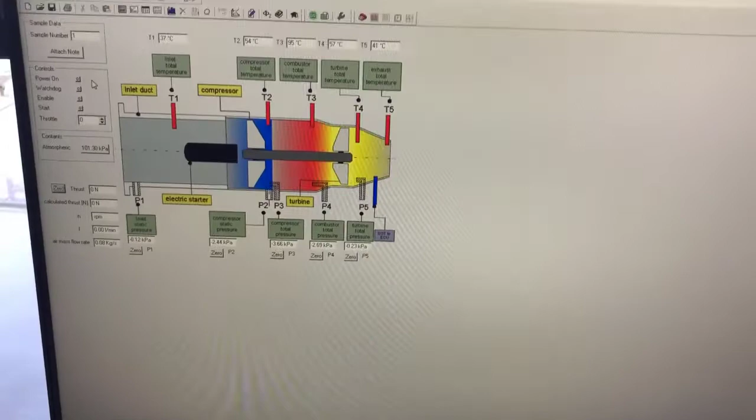So first we will discuss the equipment that we're going to use. The jet engine that we have here is manufactured by Armfield. We have one software wherein we can do the control, and all the readings we can take from the software. So here, as you can see, we have the mimic diagram of the complete gas turbine: the inlet duct, the compressor side, the turbine side, and the electric starter. All the temperature and pressure at each point is given by this software.

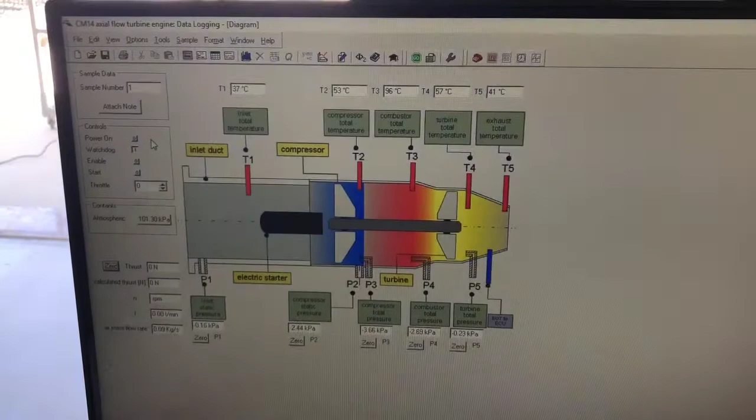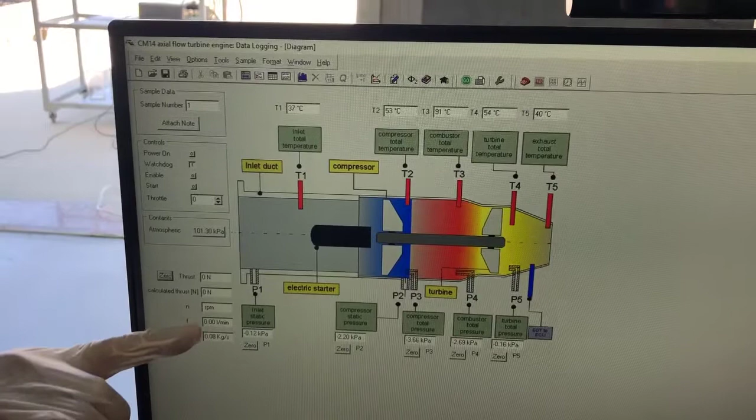Now on the left side, you have the control: power on, watchdog, enable, start, and throttle. We will discuss this later during the experiment on how to control the equipment. Below it, we can read the thrust produced by the turbine, the calculated thrust, the RPM, the fuel consumption. This is the volume flow rate of the fuel. Below it, we have the air mass flow rate. So this is the air coming in on our turbine.

So there are three parts of this equipment. One is the software, second is the electric console, and then the equipment itself. So first, this is the software. Next, let's go to the equipment. So this is the electric console. This electric console is the interface between the computer and the equipment that we have. This is the second part of our equipment. And the third part is the gas turbine itself.

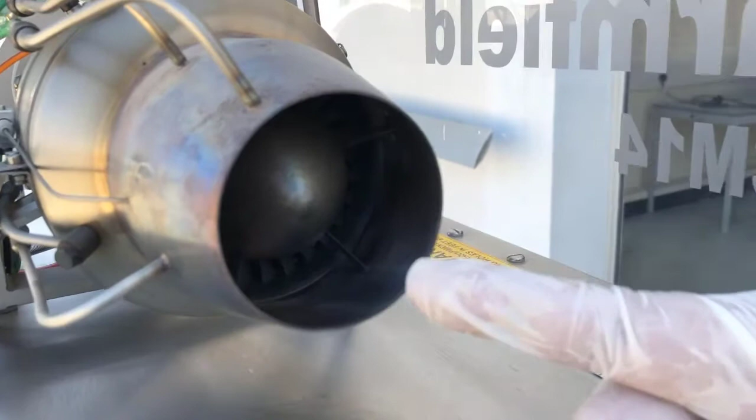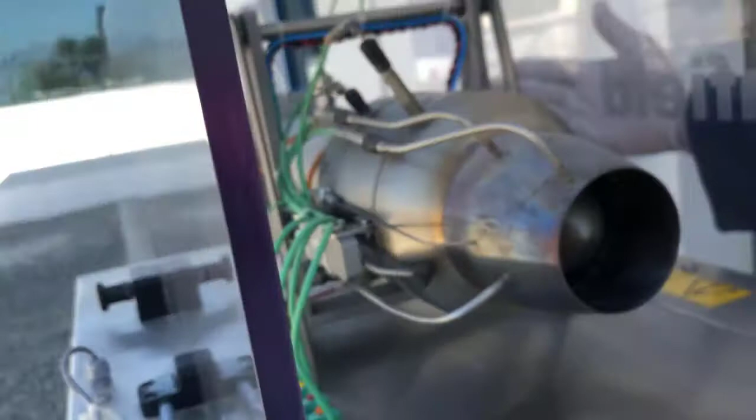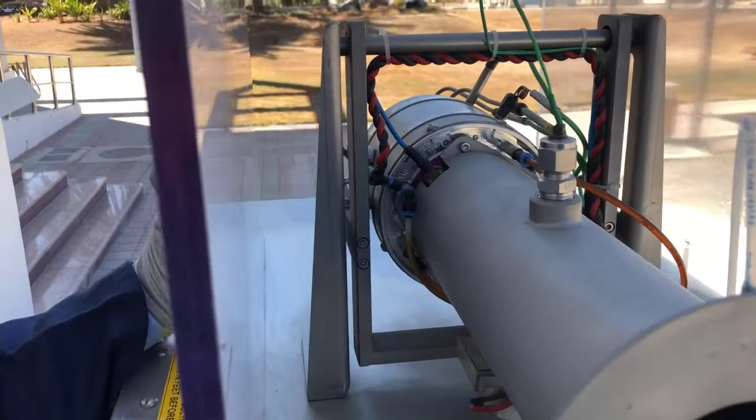Okay. So we have here the air. The air intake will come from here. Then we have one combustor here. So we have one compressor here, the combustor, and the turbine itself at the end here. As you can see, if you make it closer, the turbine blades are inside. So the process in this experiment: from the air intake, the air will be compressed inside, and then there is a combustor in between. Introducing the fuel and the air, it will burn and run the turbine.

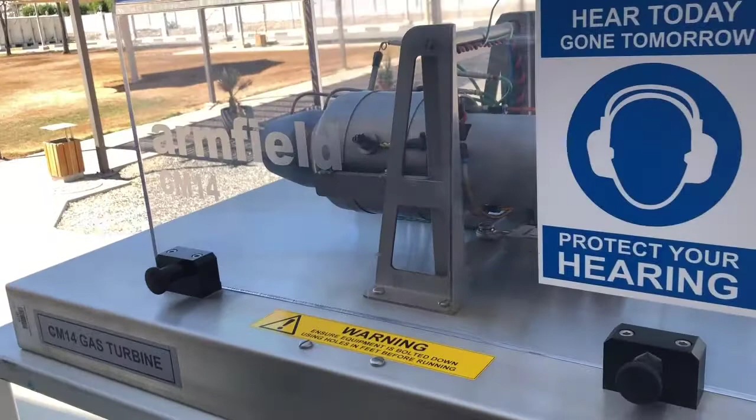So in the first experiment, we will help the students familiarize with the control of the equipment itself, before proceeding with experiment 2B, or the second experiment on the gas turbine, which is the enthalpy entropy diagram. So here we have one emergency control. We have the fuel tank below. So these are the parts. And we have one more emergency switch far from the equipment, so just in case there is a malfunction, we can shut off the equipment from far. Okay.

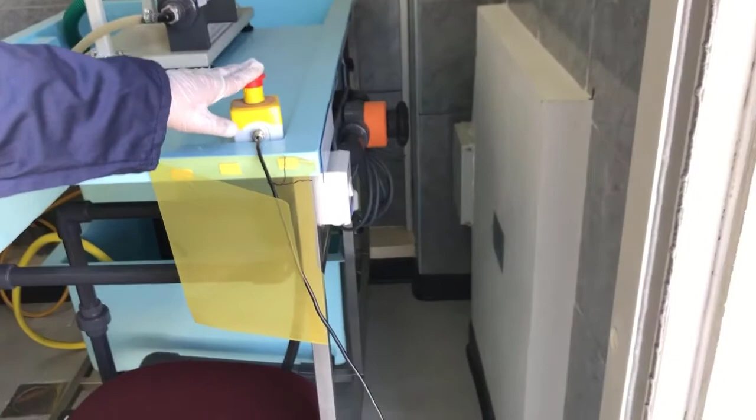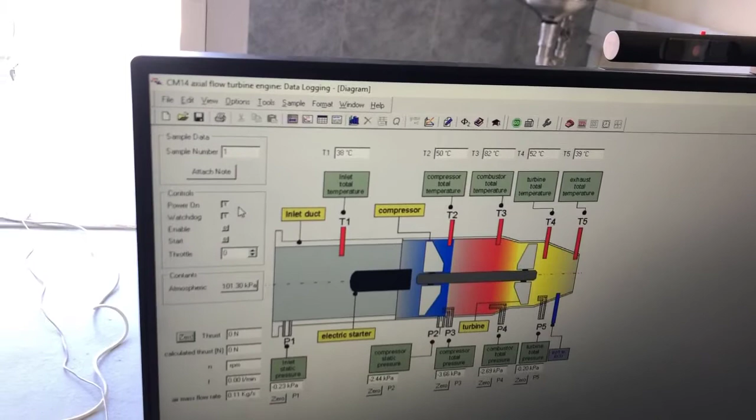So let me teach you how to start the engine. To start the engine and control it, you have the power on. As you can see here, the designation is 0. Once you press this, it will become 1, which means it is active. And then the watchdog keeps on blinking from 0 to 1. Then press the enable button and start the engine. At the beginning, in the idle state, you have 0 throttle. So we will throttle the engine. At first, it is on 0.

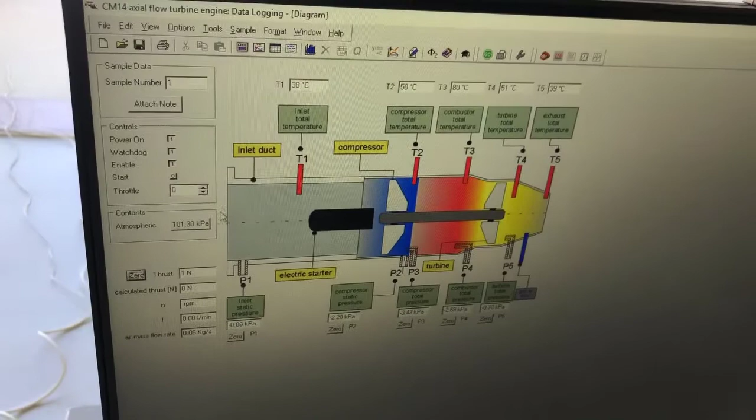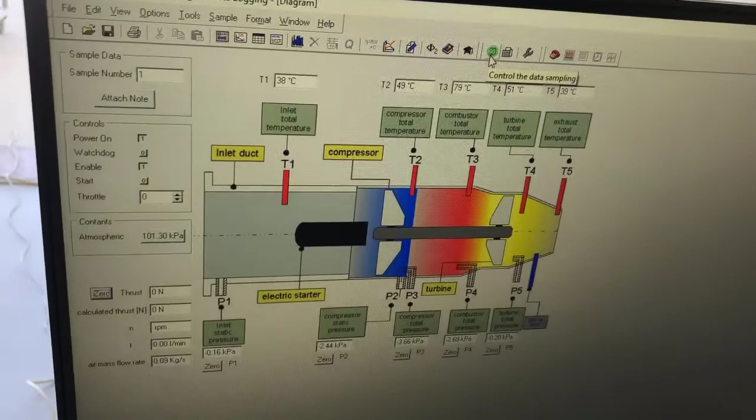At 0, in the idle state, the RPM of the gas turbine is almost 37,000 RPM. At the beginning, we will start this, and then we will introduce throttling in terms of percentage, 10%, 20%, and then we will take the reading for it. This button here, the green one, is to control the data sampling. So we will run the equipment on its idle state. To start, there is a start sequence. When you press this, just wait for 30 seconds before the engine will start.

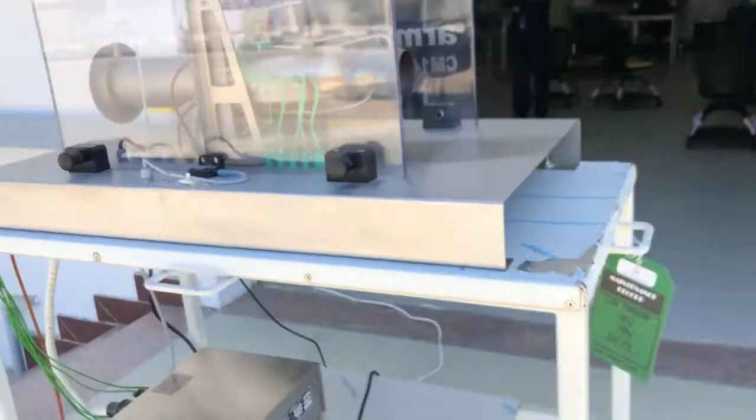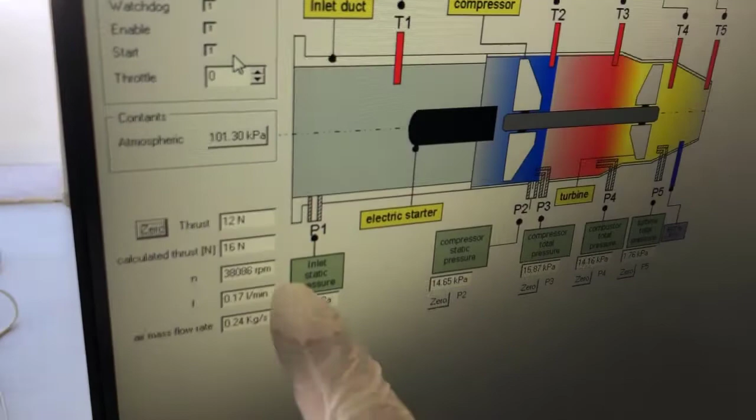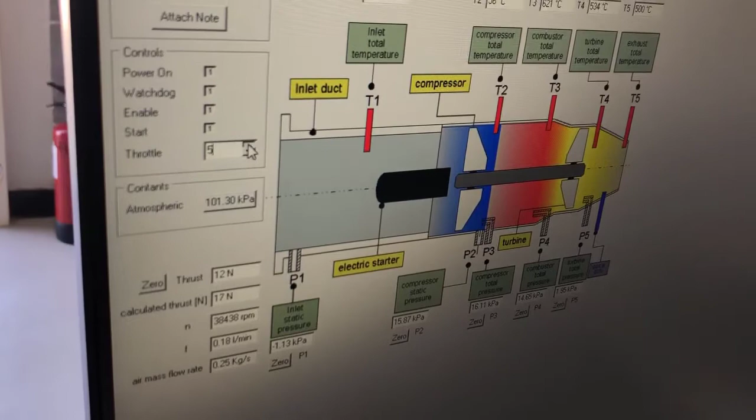So this is the starting sequence. As you can see here, we have 38,000 RPM. We are on idle state. At this point, we will introduce, for example, a 5% throttle. 5% throttle, so just type 5. Then observe the RPM. It is now increasing from 37, 38, 39. So as you increase the throttle, it will increase the RPM.

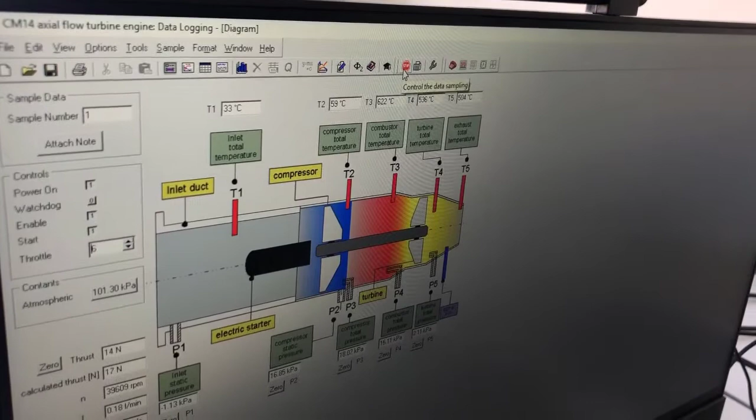So take a look at the fuel consumption. And now we are ready to take the reading. So press this button, let's go. It will take the sampling automatically into 15 readings, at 6% throttle. Okay? Once we get at least 15 readings, we can stop the reading here.

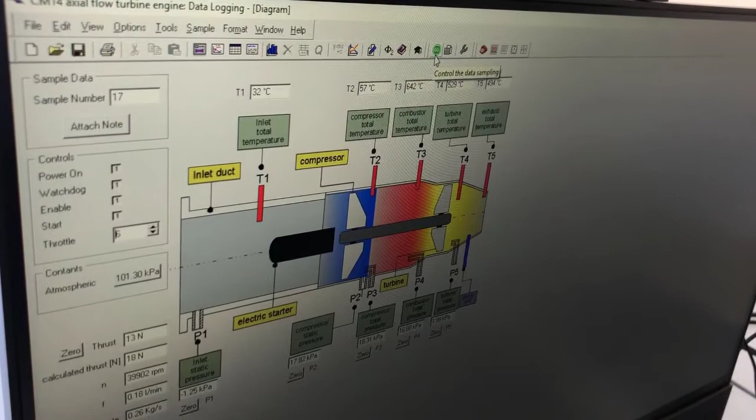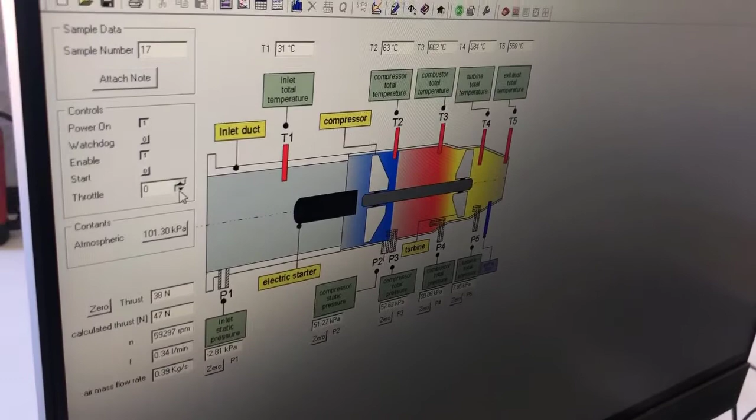Now, to stop the engine, you can just press the start button again and it will go to the stop sequence. So there is a stop sequence. Press this one. Wait for some time before it completely stops.